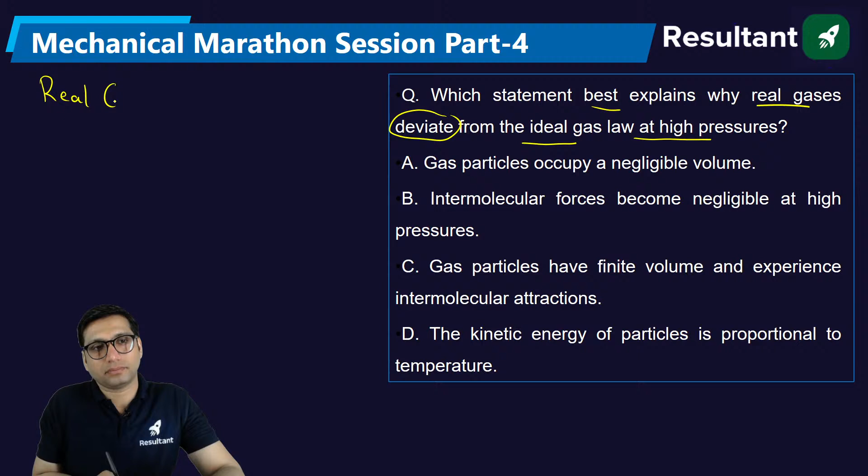Which statement best explains why real gases deviate from the ideal gas law at high pressure? As you know, we say that real gases behave as an ideal gas at low pressure and high temperature. At low pressure and high temperature, the real gas behaves as an ideal gas, right?

Now here they are saying that real gases will deviate from the ideal gas at high pressure. Yes, if you see the real gas at high pressure, then that real gas will not follow the ideal gas behavior. It will deviate, meaning it will not follow the ideal gas behavior. What is the reason behind that? Reason given: at high pressure, the gas particles occupy a negligible volume.

No. Intermolecular force becomes negligible at high pressure - no. Gas particles have finite volume and experience intermolecular attraction - yes, this is the reason. Because these are the conditions when a real gas behaves as an ideal gas.

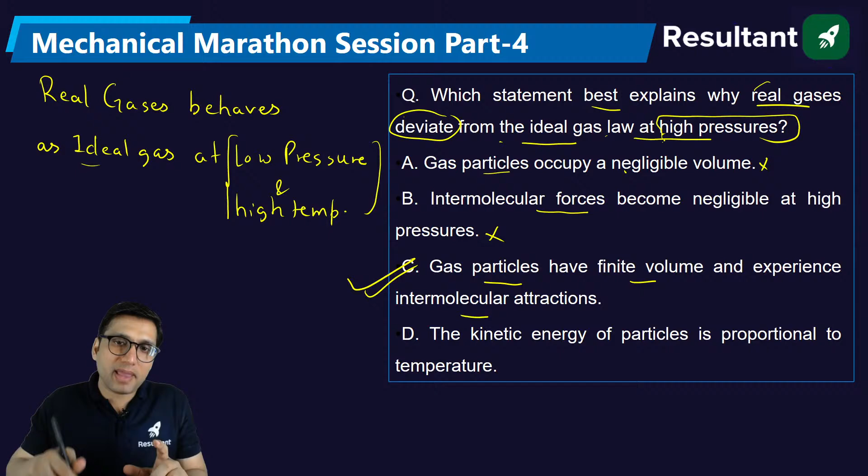Deviate means not following something. So real gas will not follow ideal gas behavior when the pressure is high. Why? Because there are a few assumptions we follow for the ideal gas. Those assumptions are, when the pressure is low and temperature is high, the ideal gas will have negligible volume and there will be very less force of attraction. But a real gas will have some volume and it will experience intermolecular attraction.

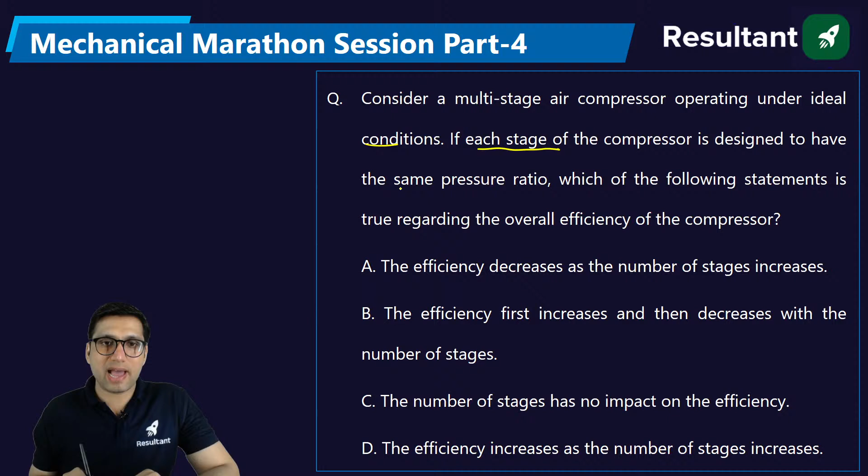Consider a multi-stage air compressor operating under ideal conditions. If each stage of the compressor is designed to have the same pressure ratio in the multi-stage compressor. Suppose we have a multi-stage compressor where the pressure ratio in each stage is equal. This is first stage compression, this is second stage, this is third stage, and between each stage we are using an intercooler. What are we using here? We are using intercooling between each stage.

In this question, it is mentioned that there is the same pressure ratio in each stage. What is the meaning of same pressure ratio? If the pressure ratio is same, that means the intercooling becomes perfect. And if perfect intercooling is there, then the efficiency will increase as the number of stages increases. Which efficiency? The volumetric efficiency will increase. As the stages of compression increase, the volumetric efficiency will increase. So the right answer will be option D for this question.

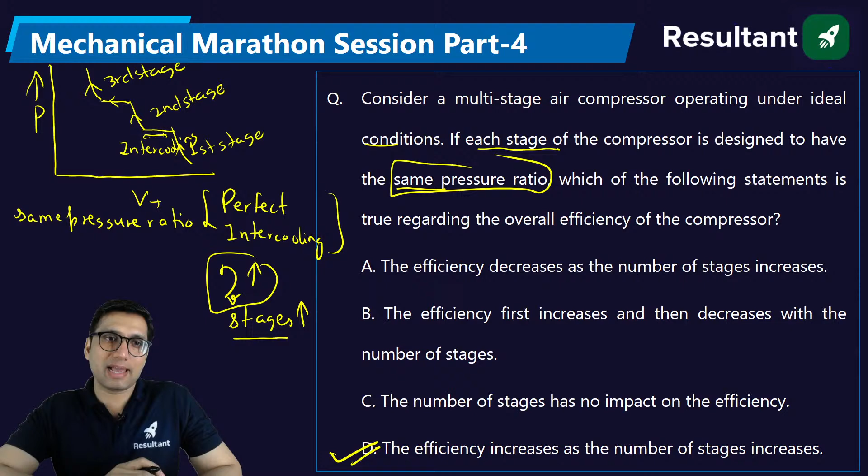So if you increase the number of stages of compression with perfect intercooling having the same pressure ratio, then volumetric efficiency will increase. Next question.

Consider the following statement with regard to hydraulic turbine: Kaplan turbine are most efficient at part load operation. Kaplan turbine comes under the classification of axial flow turbine, and it has adjustable blades. Because of having adjustable blades in the Kaplan turbine, it has part load efficiency.

What is the meaning of part load efficiency? There are two conditions in which you can operate a turbine: full load, or full potential, or part load. That applies for any work producing device, whether turbine or engine. Even for an engine, you can operate at full load, part load, half load. So because of having adjustable blades, the Kaplan turbine has better part load efficiency. So that statement is correct.

If n is the number of jets in the Pelton turbine, then the specific speed is proportional to square root of n. The specific speed formula is n times square root of n into p, divided by h power 5 by 4. In this formula, n represents the number of jets. So is specific speed proportional to square root of n? Yes, this is correct.

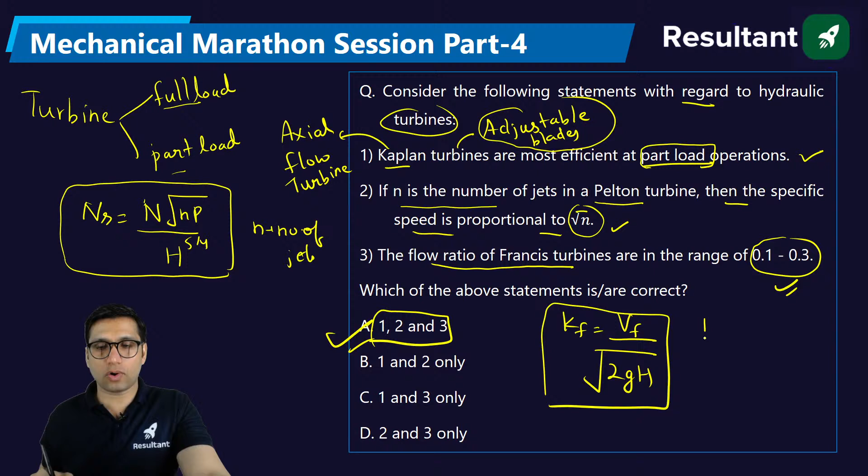What is flow ratio? The flow ratio is equal to flow velocity divided by the square root of 2gh. This is called flow ratio. This is also related to speed ratio, which is equal to blade speed divided by the square root of 2gh. Now this is called as speed ratio.

The speed ratio of the Francis turbine is between 0.6 to 0.9, but the flow ratio is from 0.15 to 0.3. Clear? So maybe next time they can ask you this: 0.15 to 0.3. So this is also correct. All the options are correct.

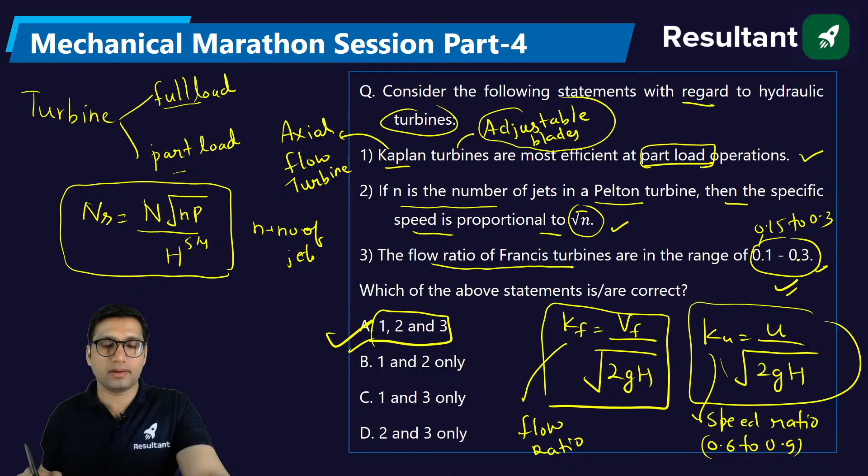For linear distribution of the velocity in the boundary layer on a flat plate, what is the ratio of displacement thickness to the boundary layer thickness?

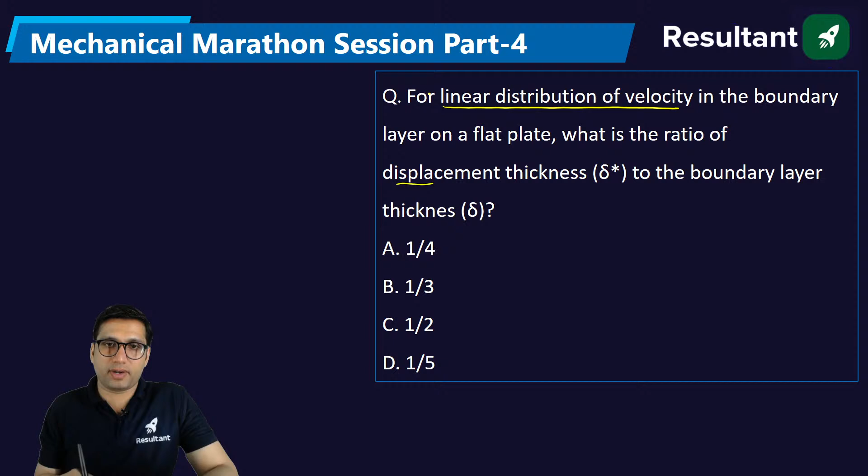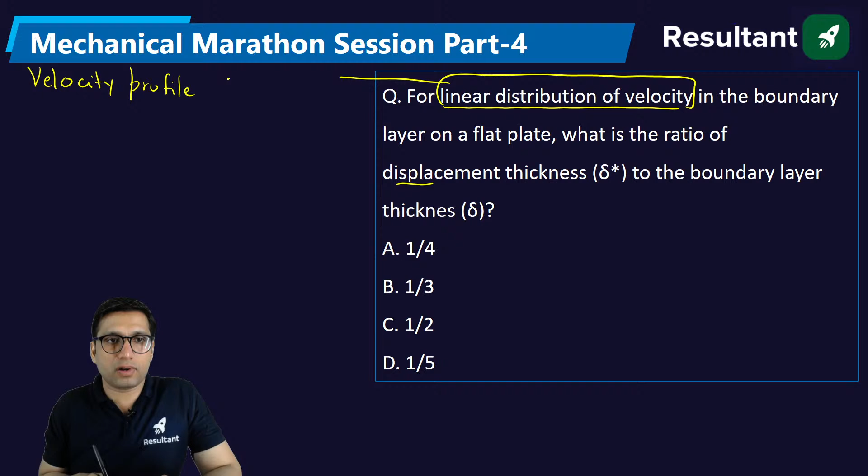What is the meaning of linear distribution of the velocity? Linear distribution of velocity means there is something called velocity profile. Whenever a fluid flows over a surface, it follows some profile based on the flow behavior of the fluid, given by u by u infinity equals y by delta. This equation is called the velocity profile, and this particular case is called linear velocity profile.

Now for this linear velocity profile, they are asking the ratio of displacement thickness to boundary layer thickness. What is displacement thickness? It is the integral from 0 to delta of 1 minus u by u infinity, dy. Since this is a linear velocity profile, this becomes integral from 0 to delta of 1 minus y by delta, dy. If you integrate this, you get y minus y square by 2 delta. Putting the limits 0 to delta, you get delta minus delta square by 2 delta, which equals delta by 2.

So displacement thickness is equal to delta by 2. You have to find the ratio of displacement thickness to boundary layer thickness. This will be delta by 2 divided by delta, which is 1 by 2. So 1 by 2 will be the answer. Clear?

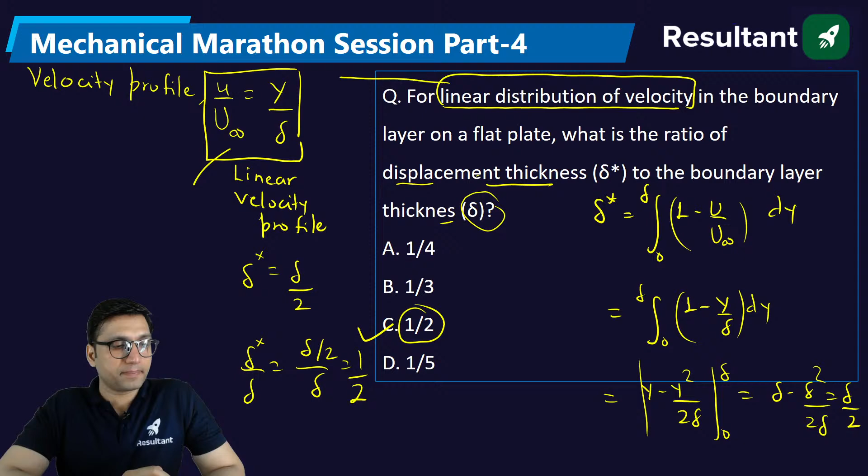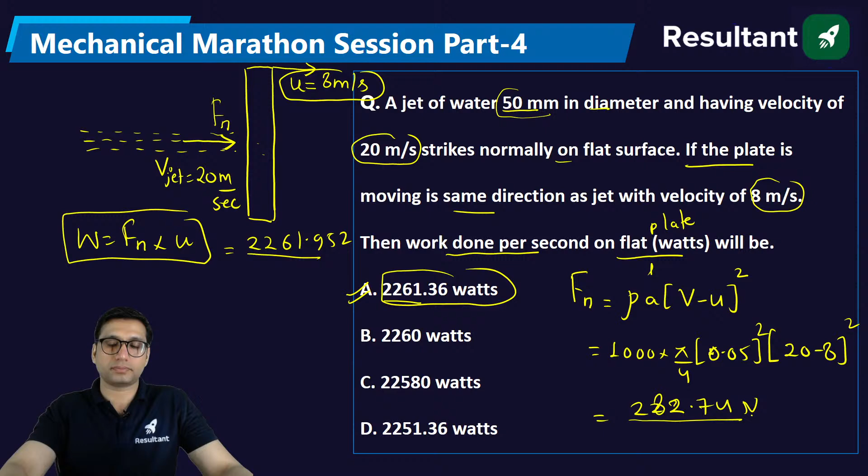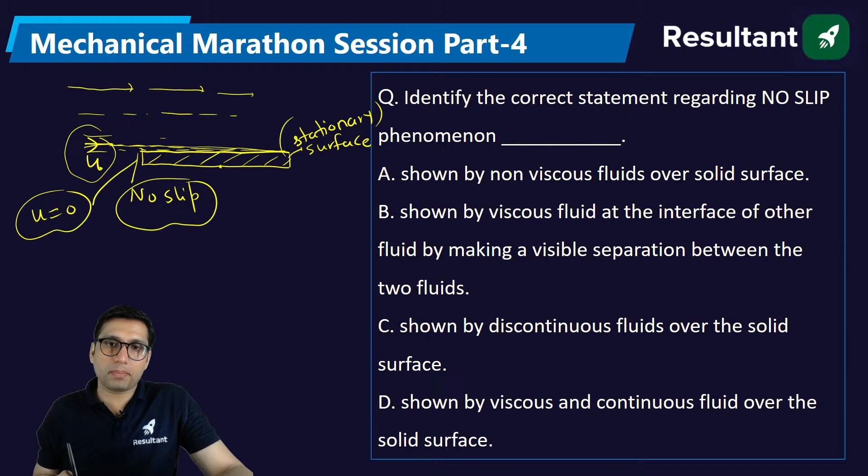It is shown by non-viscous fluid. First of all, they are saying it is shown by non-viscous fluid. Tell me, is the fluid viscous or non-viscous? Non-viscous means not having viscosity. This is wrong, because obviously the fluid will be having some viscosity. So option A is not correct.

Shown by viscous fluid at the interface of another fluid by making a visible separation between the two fluids. No, it is not with respect to two fluids. This statement means they are saying that the no slip condition is with respect to two fluids, fluid number 1 and fluid number 2. Is this with respect to two fluids? No, it is shown by viscous and continuous fluid when it moves over the solid surface.

It is shown when a viscous and continuous fluid, continuous means continuously moving fluid, moves over a solid surface; then this no slip condition happens. Now, no slip can happen on a flat plate, and it can happen on a pipe surface also. Suppose this is a pipe. The fluid particles which flow close to this pipe surface will be having the no slip condition. So here also no slip applies. Here also no slip condition applies.

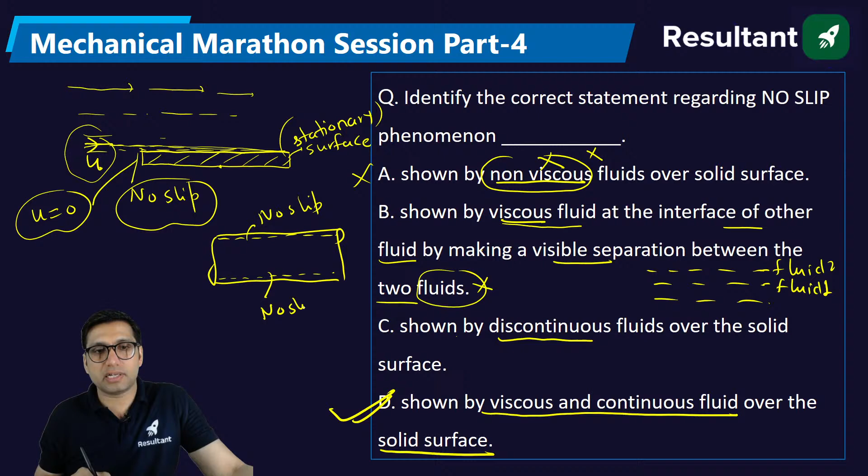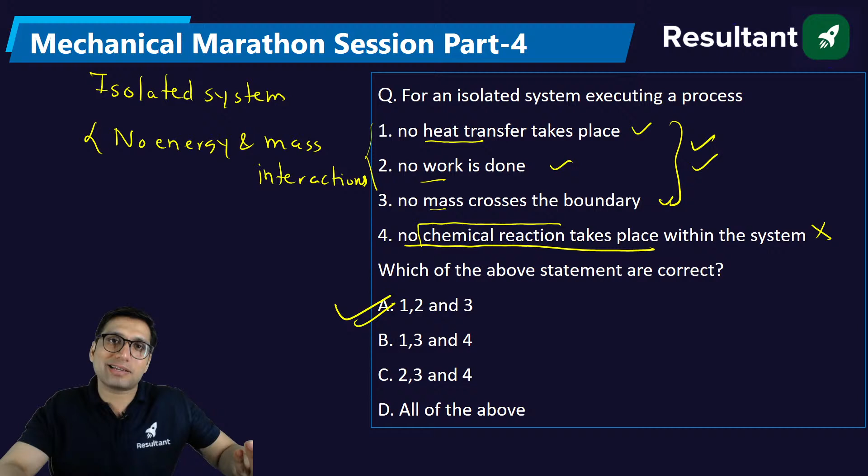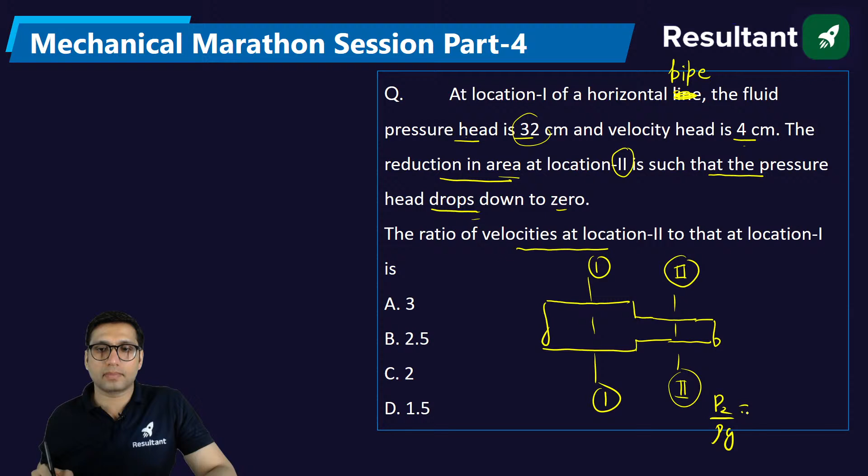All right. So basically, at location 1 of a horizontal pipe, the pressure head is given, velocity head is given. At location number 2, the area is reduced such that the pressure head is 0. Here the velocity head is 4 centimeter and the pressure head is 32 centimeter. They are asking the ratio of velocity at location 2 to that of location 1. So you have to find the ratio of V2 with respect to V1. How are you going to find this? Tell me.

First we will apply the Bernoulli's equation between section 1 and section 2. It will be P1 by rho g plus V1 square by 2g plus Z1 equal to P2 by rho g plus V2 square by 2g plus Z2. Because this is a horizontal pipe, Z1 will be equal to Z2. P2 by rho g, the pressure head is already 0 at section 2. So what we are left with, P1 by rho g is given as 32, this is given as 4,

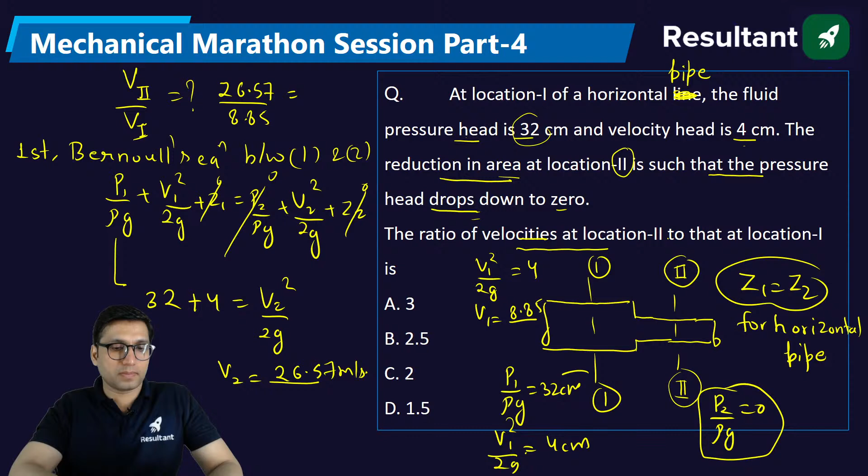V2 square by 2g. So from here you will get velocity. What is the velocity at section 2? Come on, tell me. You will get somewhat like 26.57 meter per second. And if you know V1 square by 2g is equal to 4, velocity V1 you will get from here, it will be 8.85. So this value will be 26.57 divided by 8.85. You will get 3 as the answer. The answer will be option A, 3. Are you all getting the same value? If you are, then very good.

That can be also done. See, I always try to give the simplest explanation. You can also do that. You can directly find the ratio of velocity head, whatever suits you. You can take V2 square by 2g divided by V1 square by 2g. From there it will be V2 square by V1 square, and then you can get the square root. That is also a very easy approach. Yeah, you are correct, so that approach is also fine.

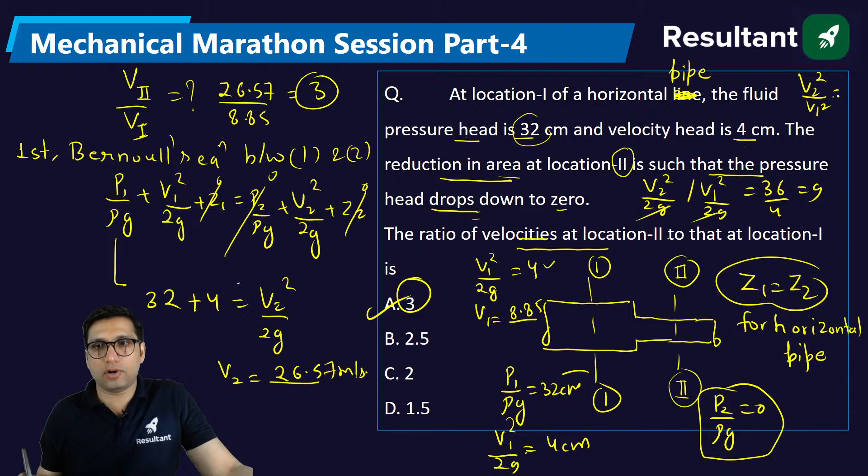V1 square, this is 4, that is 36. 36 by 4, that will be 9. And from there, square root of 9 will be 3. So simply you can get the answer. So that is also a great approach. V2 square by 2g divided by V1 square by 2g will be equal to 36 by 4, that is 9. This 2g will get cancelled out, so you get V2 square by V1 square is equal to 9. So V2 by V1 will be 3. Okay.

In this question, there is a frictionless piston cylinder device, and that device contains 5 kg of steam at 200 degrees Celsius, and to this steam you are transferring heat. Because of that, the temperature has increased to 250. If the piston is not attached to a shaft, its mass is constant. So taking the value of specific volume, find the work done by the steam. So work done will be

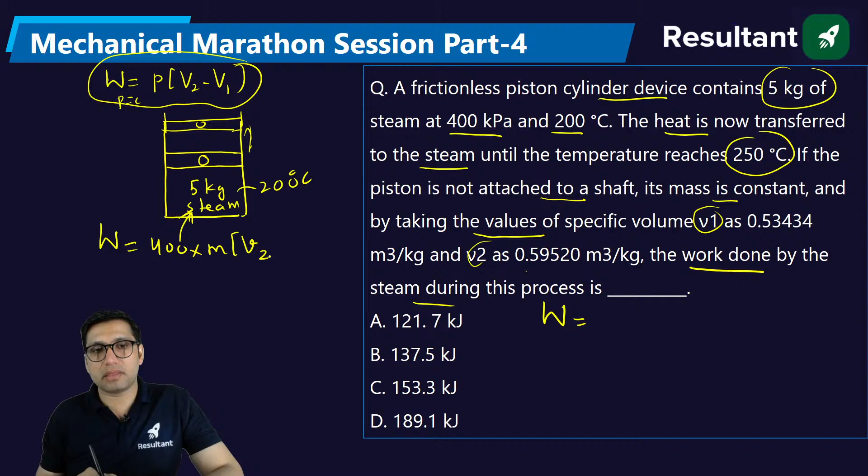when the heat is supplied, obviously this piston will move, it will expand. Because of that, the work will be at constant pressure. Constant pressure work will be pressure into change in volume. So work is pressure, 400, into change in volume, which is mass into change in specific volume. So the work will be equal to 400 into 5 into V2 minus V1, 0.59520 minus 0.53434. Solve it, you will get the answer.

So you will get the answer as 121.72. Option A will be the right answer. Clear? All of you are getting the same value? Now you must be thinking, sir, why have you applied the work for constant pressure only? Because there is no shaft attached to this, so we are not doing any kind of shaft work. In that case, the piston will be free to move.

So when the heat is supplied to this, although pressure will tend to increase, because the piston will move, overall the pressure will remain constant. So that is why this is a constant pressure system. And for constant pressure, you can find the work by this relation. Here specific volume is given, mass is given, and the pressure, kept constant, is also given.

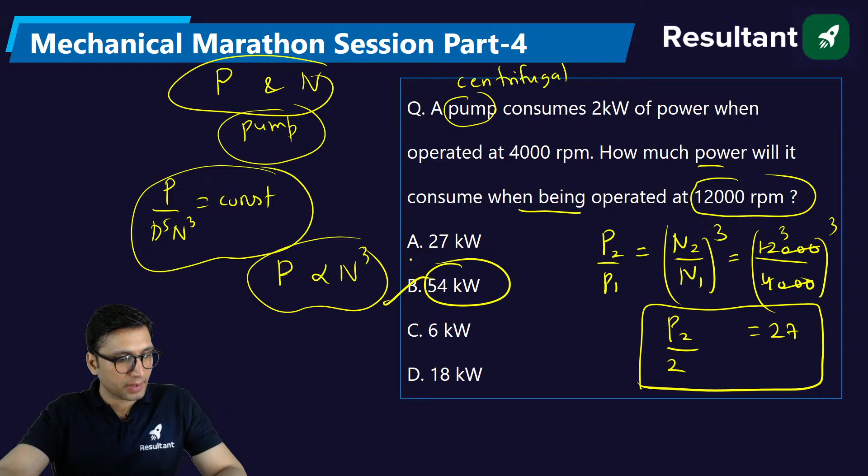In a steady flow compression process, the increase in the specific enthalpy is 20 kJ per kg and decrease in the kinetic energy is 2 kJ per kg. The rate of heat rejection to the surrounding is 5 kW and mass flow rate of the gas is 2 kg per second. The power required to compress the gas is? How are we going to approach this question? Obviously, it is a case of steady flow energy equation. Yes.

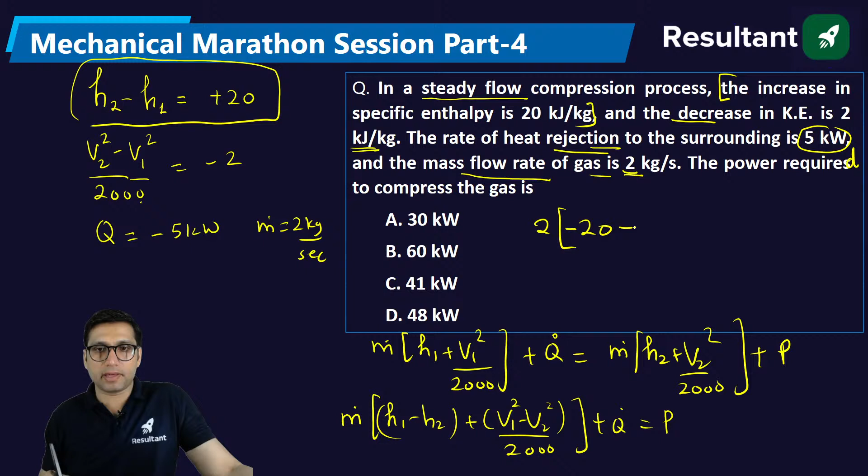If this is plus 20, then H1 minus H2 will be minus 20. V2 square minus V1 square by 2000 is equal to minus 2, so this will be plus 2. If this is minus 5, put minus 5. What value are you getting? Minus 20 plus 2, that is minus 18, into 2, minus 36, minus 5. So you will get power input is equal to minus 41 kilowatt. Option C will be the right answer. Are you all getting this value? Tell me.

This kind of question can also come in the exam where they give you the increase or decrease in some quantity. Always remember, when they say increase in something, the difference between the final and initial value is positive. If it is decrease, the difference between the final and initial value is negative.

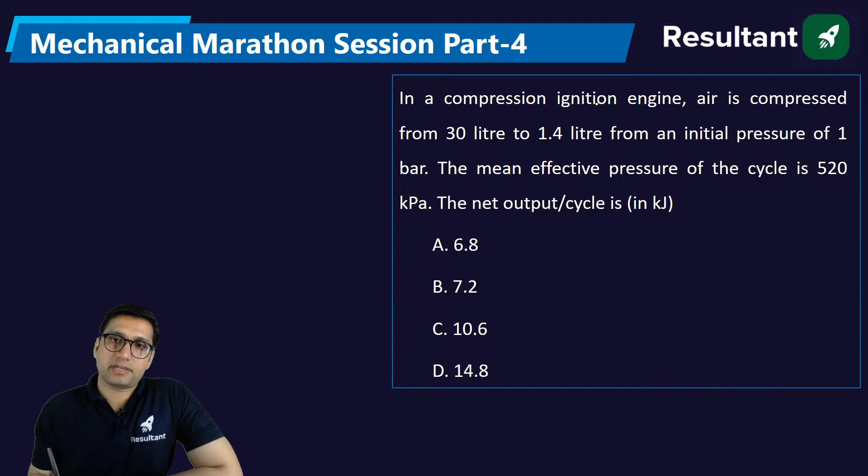In a compression ignition engine, air is compressed from 30 liter to 1.4 liter from initial pressure of 1 bar; the mean effective pressure is 520. Net output of the cycle in kilojoule? You know that mean effective pressure is equal to net work by swept volume. We can simply use this formula and get our answer of net work. This mean effective pressure is given as 520 kilopascal.

Yes, minus 41. Why minus 41? That means it is compression work. It is work input. What does the negative sign represent? This is compression work. So compression work, obviously it will be negative.

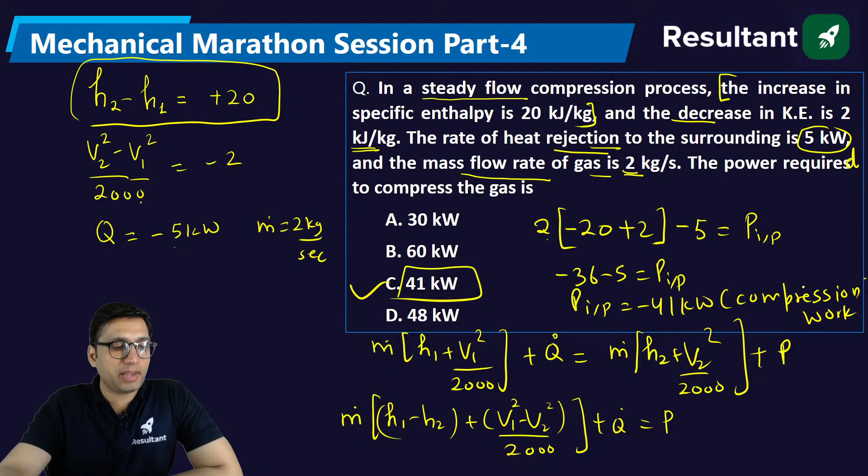So this is given. Net work you have to find. If you know the value of swept volume somehow, you can get your answer. So how to get the swept volume? In a compression ignition engine or diesel engine, the air is compressed between these 2 points. From point 1 to point 2 the air is compressed, and the volume at point 1 is 30 liter.

And at point 2, after compression, the volume is 1.4 liter. So this is also called total volume, which is swept volume plus clearance volume. This is known as clearance volume. So V1 minus V2 will be equal to swept volume. So net work will be simply equal to 520 into (30 minus 1.4) into 10 power minus 3. Solve it, you will get the answer.

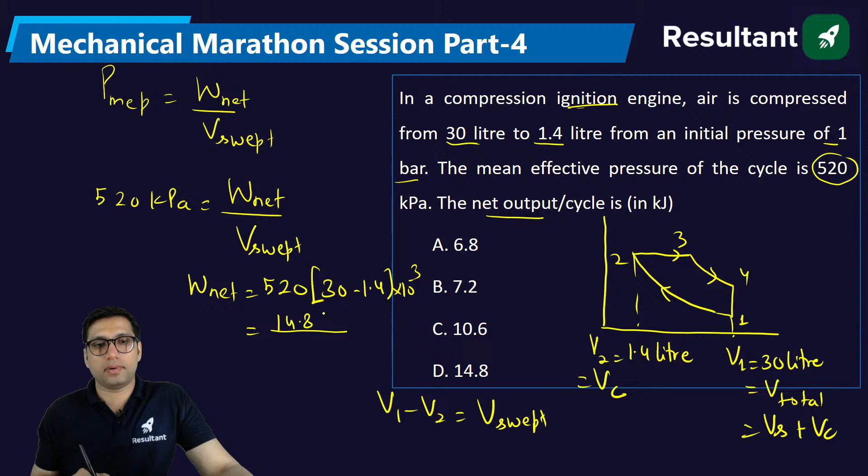Most of you have already solved. So let me also... so you will get 14.8 kilojoule. Okay, clear? Next question.

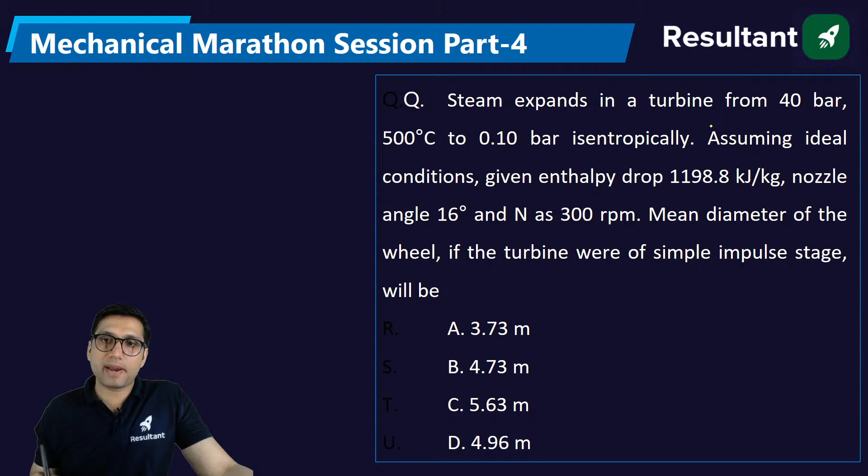Steam expands in a turbine from 40 bar 500 degrees Celsius to 0.10 bar isentropically, assuming ideal condition, given enthalpy drop is 1198.8 kilojoule per kg, nozzle angle is 16 degree, and RPM is 300. Mean diameter of the wheel if turbine were of simple impulse stage will be? So much data is given, right? Question looks confusing, but it's not. It's a very simple question.

So in this question, it is mentioned that isentropically the pressure is getting dropped from 40 bar to 0.10 bar in a turbine, right? Assuming ideal condition, the enthalpy drop is given. So how to find the diameter? You know that blade speed is equal to pi D N by 60. If you get the value of blade speed somehow, then N is given as 300. This is pi D. You can get the value of D from here. But how to get the blade speed?

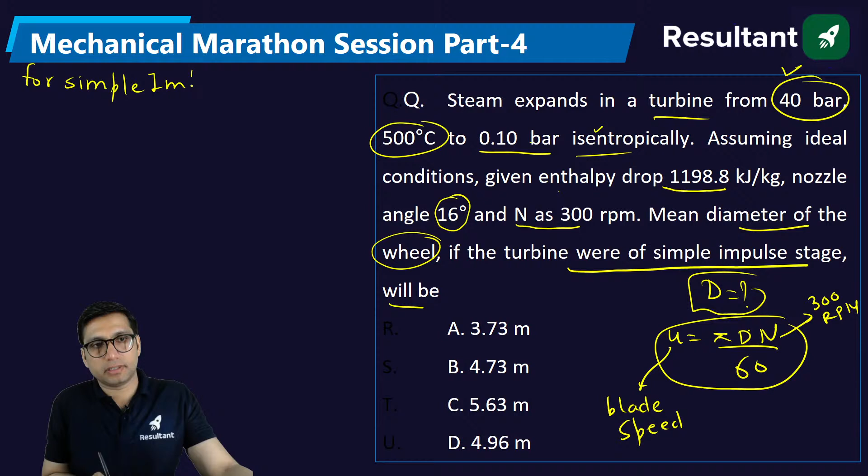Now, for simple impulse turbine, the blade speed ratio is equal to cos alpha by 2. We will be getting this value. Alpha is given as 16, so this will be cos 16 by 2. From here you will get the ratio of blade speed and jet speed. So it is very obvious that if you get the value of jet speed, your problem will be solved. So how will you get the jet speed?

Jet speed will be square root of 2000 into delta H. Delta H is already given in this question. So you will get this as square root of 2000 into 1198.8. From here you will get the value of jet speed in meter per second. From here you will get blade speed in meter per second. And if you put it here, you will get the diameter. Clear? Okay. I request everyone to take out a few seconds to solve it. Don't be in a haste of, sir, it's taking so much time, let's not solve this question. Don't do that.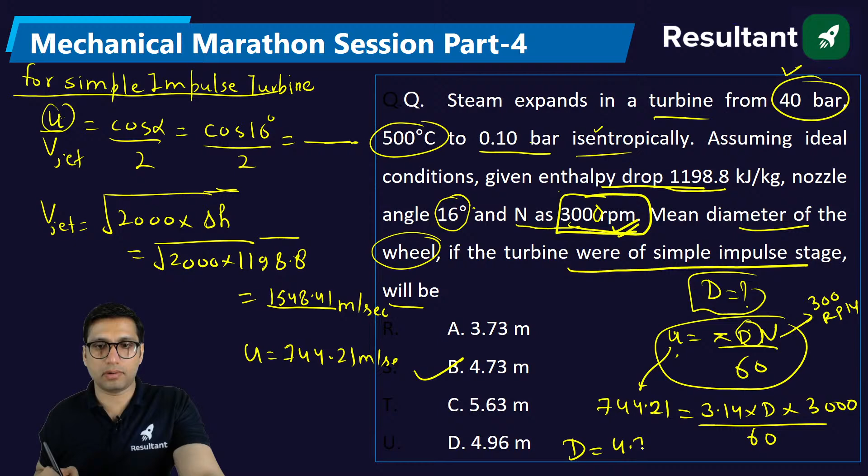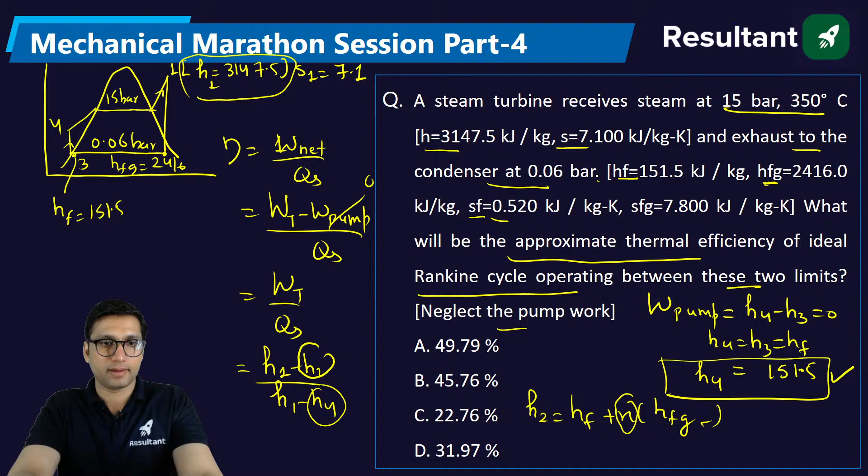So you know that 1 to 2 is an isentropic process, so entropy at point 1 will be equal to entropy at point 2. Entropy at point 1 is 7.1. Entropy at point 2 is in the wet region, that will be SF plus X times SFG. So from here you will get the value of X.

SF and SFG is given, get the value of X, put the value of X here. You will get 151.5 plus X into 2416. You will get H2 from here, X from here, and your answer will be solved. Tell me, what is the dryness fraction?

So dryness fraction will be 0.843. Put the value here and you will get this value. This value will be 2189.61. Okay, so now you will get the efficiency from here. Put all the values and you will get the efficiency. What will the efficiency be?

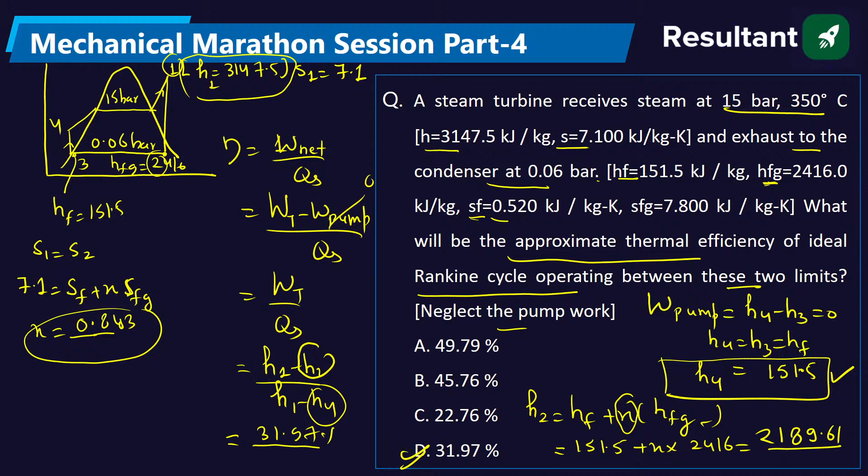So you will get efficiency at 31.97. Okay, simple question, but maybe the calculation was a little bit tough. But if there will be some question on the Rankine cycle in the exam, this can be the question. Clear? Understood everyone? Next question.

A rectangular plane surface of width 2 meter and height 3 meter is placed vertically in the water. What will be the location of the center of pressure of the surface when its upper edge is horizontal and lies 2.5 meter below the free surface of water? So basically we are having this free surface of the water. So this is water everywhere, and this is, let's say, the free surface. And we are having a rectangular plane surface.

A rectangular plane surface is such that how much? 2.5 meter below the free surface. From this point, we are having this rectangular surface like this. This height is 3 meter and this is of course 2 meter.

You have to get the value of center of pressure. Center of pressure is that point where the hydrostatic force acts. That point is called the center of pressure. Center of pressure equals our direct formula for center of pressure, that is equal to...

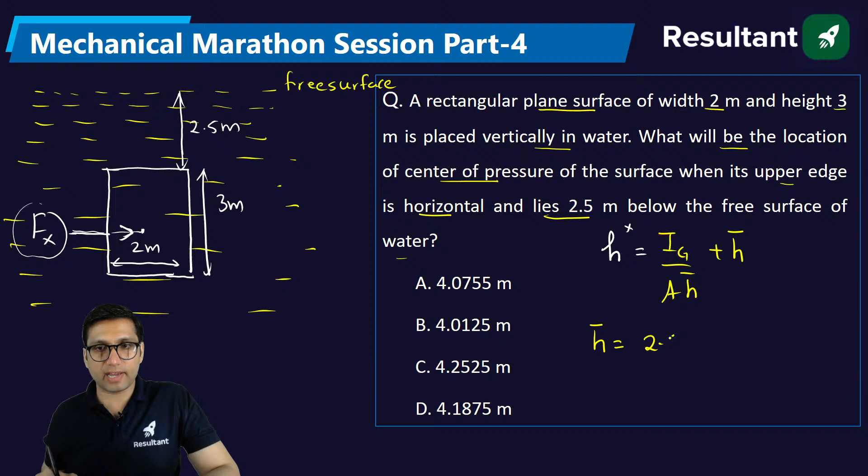Do you know the direct formula? It is Ig over A H-bar plus H-bar. What is H-bar? H-bar is the position of the centroid, and the centroid position will be 2.5 meter plus half of this, that is 3/2. You will get this value as 4 meter.

This will be the position of the centroid, because this submerged plane vertical surface is at a distance of 2.5 meter below the free surface. So total centroid position from this free surface will be, the centroid will be somewhat here at this point. At this point it will be the centroid. So this is 1.5 plus 2.5. So at this point you will get the position of the centroid, that is 4 meter.

Moment of inertia about the centroidal axis will be B into H cube by 12. B is here, how much? Width is 2 meter and H is 3, cube by 12. So you will get moment of inertia from here. Area will be equal to 3 into 2, of course. From here you will get the area. Just put everything in, you will get the answer.

So what value are you getting? Yes, come on. 0.5... you will get 4.1875. Okay, so that will be the answer for this question.